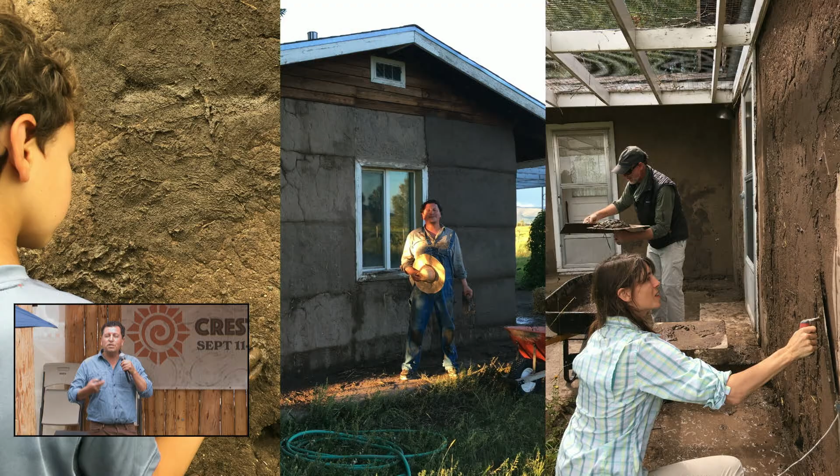My own great-grandmother's sister's family's house, which I use as a test site for teaching traditional and indigenous building technologies, how to earth and plaster in traditional ways, how to make adobes, how to make hornos. I tap into traditional cooking traditions as well that were practiced by my family. But there is an ethos around thinking about what is in the landscape and how can we build with that material.

So I host workshops often that connect people of earth and heritage practices back to these practices that have been disconnected from their traditions because of capitalism, because their lifestyles are changing, because of assimilation. And so earthen architecture practices aren't continued anymore because of changes in code regulations and building regulations. So I teach these classes on how we can reconnect ourselves through the maintenance and restoration of these buildings.

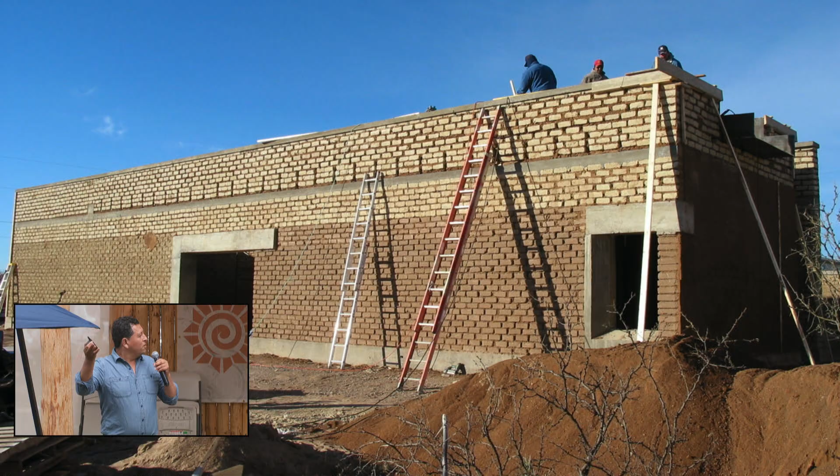Also, as an architect, I design buildings made of adobe, contemporary buildings. This is probably the first adobe building built in Marfa, Texas in 100 years, called the Box House, entirely made of adobe, plastered with adobe on the inside and on the outside. The bricks on the bottom come from New Mexico. The bricks on the top come from Ojinaga, Mexico. So there's a future archaeological project or anthropological project or geological project built into this house that connects this house to borderland landscapes.

I also think about how there's a politic embedded in building with earth. Not only the politics of working with codes, but also the politics of being activists that want to hold true to these traditions of building, and how adobe buildings can be a political project.

This was a project I collaborated on with two artists from Europe called Prada Marfa. It's not an actual Prada store. It's a sculpture. It's an installation built in the Chihuahuan Desert in the middle of nowhere, but it holds the 2005 line of Prada shoes and purses. So there's a paradox in this building.

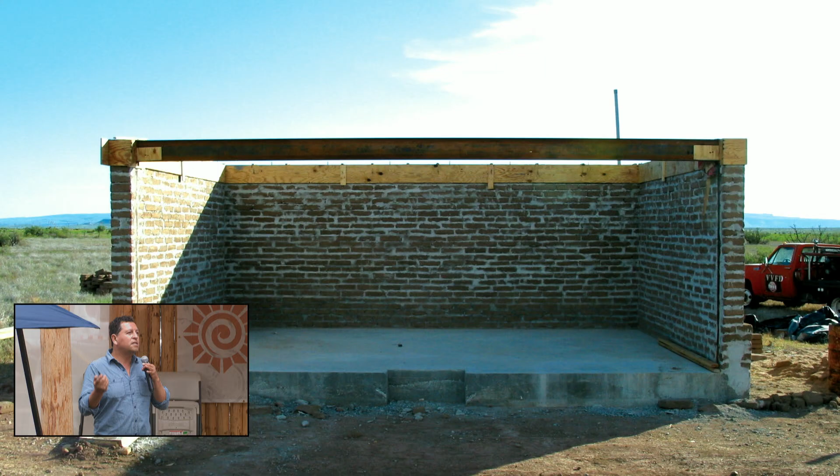There's a paradox about this building being in the borderlands, about a site where people walk hundreds of miles to come to the United States, a site where these shoes that cost in excess of $1,000 are on display, and it talks about the borders between wealth and poverty in the United States, particularly in the borderlands of Texas and Mexico, and the contemporary borderlands. A building we made out of adobe to demonstrate again that juxtaposition between wealth and poverty, between contemporaneity and history and tradition.

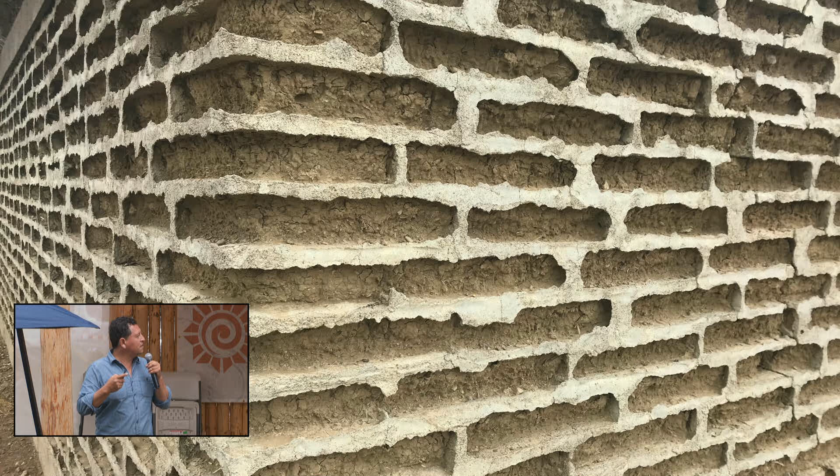We set each adobe brick in a cementitious mortar, not because that's a better way to build, but because that's what the US military used to build forts after the Mexican-American War along the Texas-Mexico border. And you can see those buildings in Marfa, Texas, and how time has taken a toll on, in fact, eroding the adobe faster because it's set in an impermeable layer of cement. In fact, this wall just collapsed recently, I was told, after being there for maybe decades or close to 100 years. But these are expressive ideas about how we can communicate politics, tradition, culture within a very single, humble material.

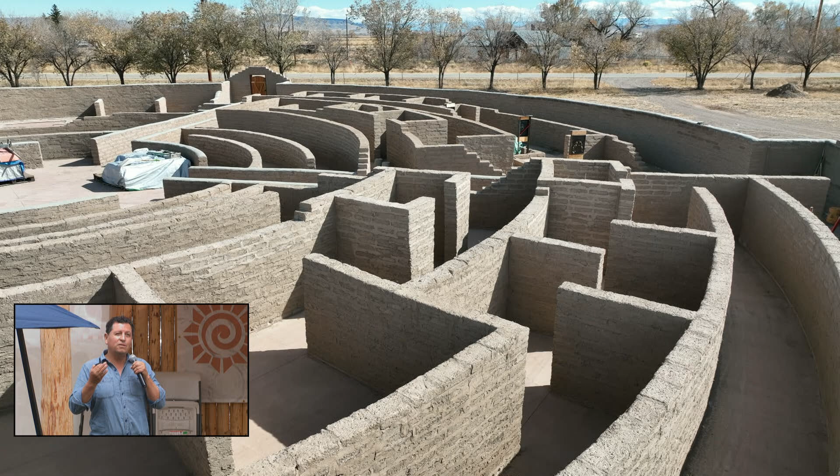If you've been to the town of Conejos in Conejos County, I've been working with the community there for 20 years to design and construct this labyrinth as a site of internal reflection, of prayer, of spiritual contemplation. And it finally was completed this year after 20 years. The community made over 40,000 adobes to build this structure. We taught the community how to make adobes, for those who didn't know, how to stack them, how to lay them. And after 20 years of slow process, this came together.

Obviously, I have an obsession with earth and architecture. I try to share this with the world. I have a website called eartharchitecture.org. You can go to that website, and it's kind of a repository of earth buildings from all over the world. Because earthen construction is actually what connects us across the planet. People build in New Mexico in the same way they build in Mali, Africa, in the same way they build in Yemen, in the Middle East. On every single continent, you can find similar construction processes and methodologies.

In 2008, I also wrote a book called Earth Architecture, which talked about earth being a modern building material, a building material that can connect us to, at that time, our 21st century lifestyles. And at the very end of the book, I wanted to talk about what the potential future of earthen construction was. I talked about how the internet was connecting us and shaping the way we can inform each other about earthen construction practices. But there was a novel technology that was emerging called 3D printing.

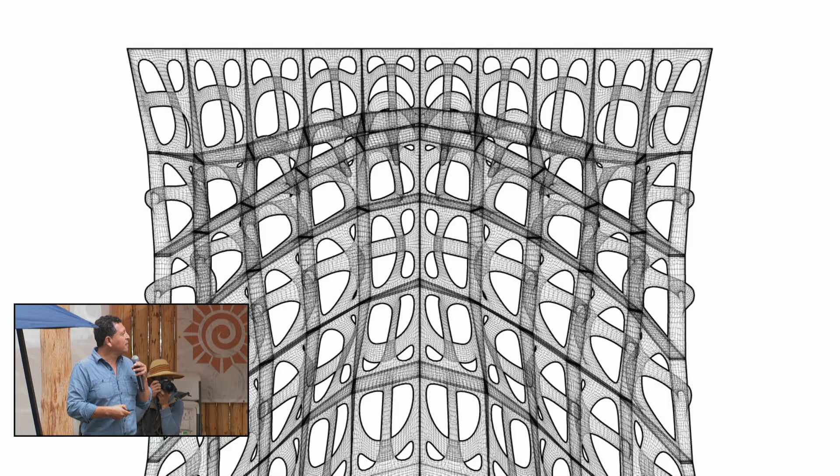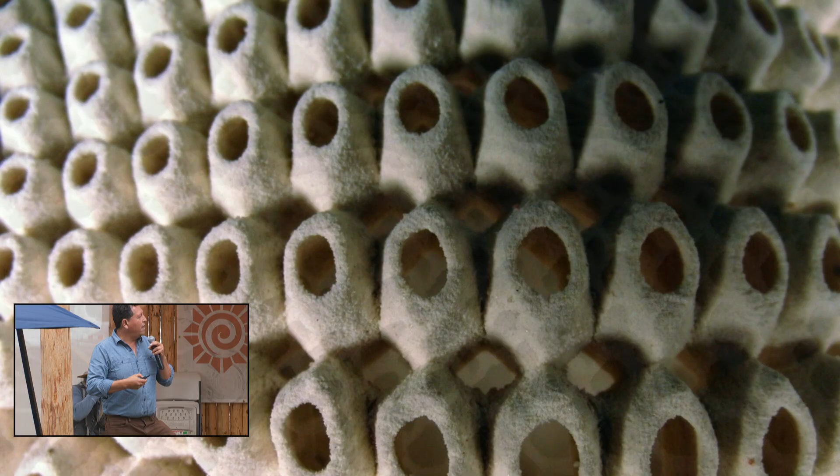And we had lots of successes in using clay and being able to use additive manufacturing to make objects like this. They were very fine and detailed, and because they were so fragile, we began to fire them and make ceramic objects. And I wondered, if a robot can make ceramics, what do we do? Do we make bricks? Do the bricks hold plants? Do we make bricks that have air pockets that can hold insulation?

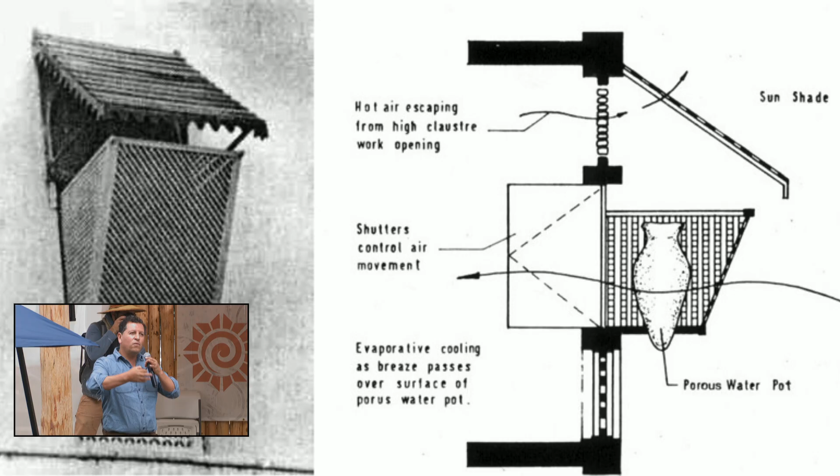Can we build upon traditional ancestral intelligence to think about how we can transform simple things like some of the earliest swamp coolers, which were made out of very porous ceramics, that were often placed in a window where cool breezes came over that humidified the air, lowered the temperature in a building? And could we make bricks that could do the same thing, that could hold water, that can pass air through, humidify the air?

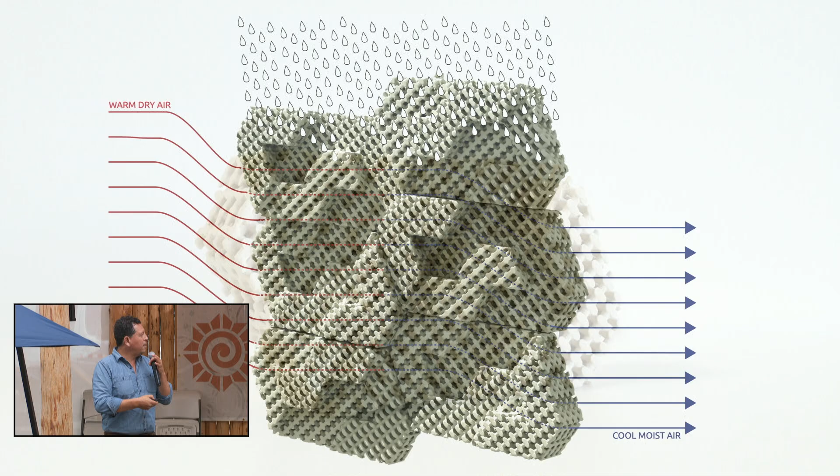And so these are some of the first 3D printed bricks that were highly porous, that had micropores that could hold enormous amounts of water, but also larger pores that air could pass through and ventilate a space inside, that had a tensile component to the way the mortar attached, and had shading elements that kept the water from evaporating more quickly. I called this the cool brick.

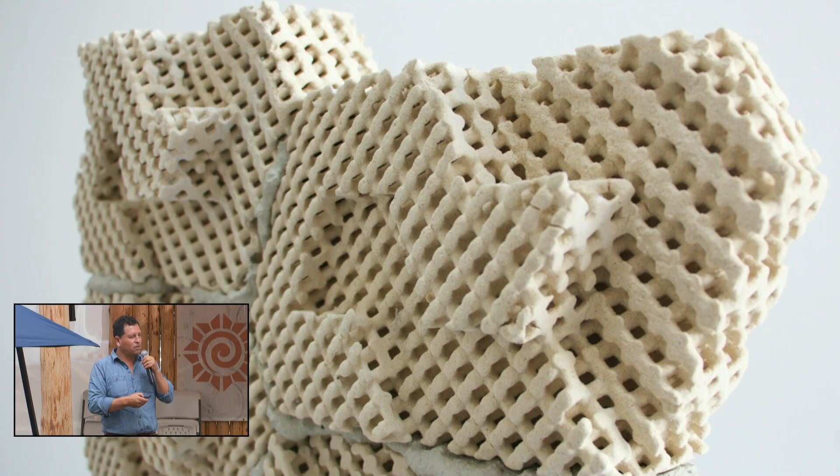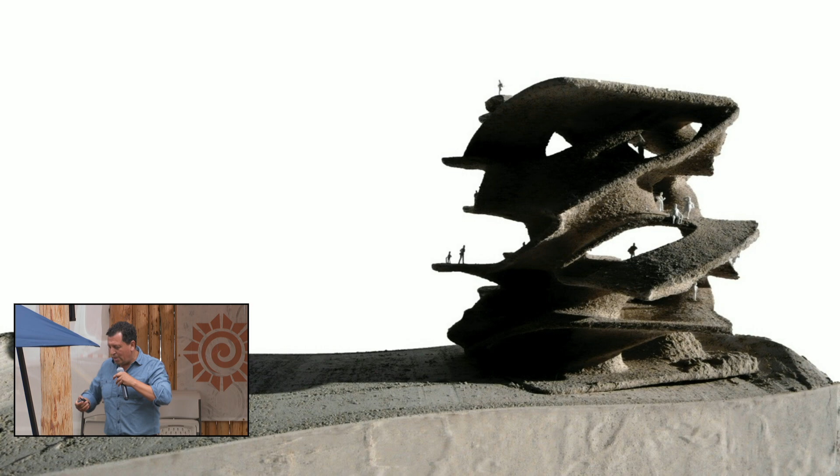So we started to use clay, started to experiment with sand, began to think about how we could make objects made out of sand. And this is at a time when 3D printing was in its infancy, and it was very expensive to print a very small object with a 3D printer. A small object as big as this microphone might have cost $80 to make at that time. But because we developed this material using sand, it became very inexpensive.

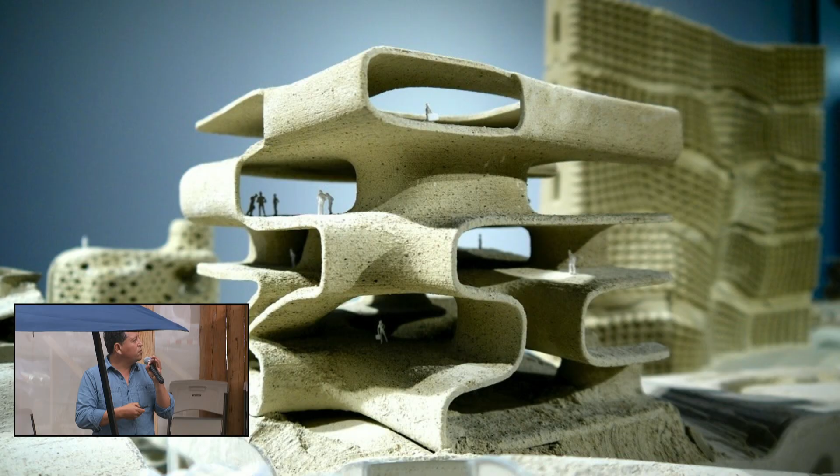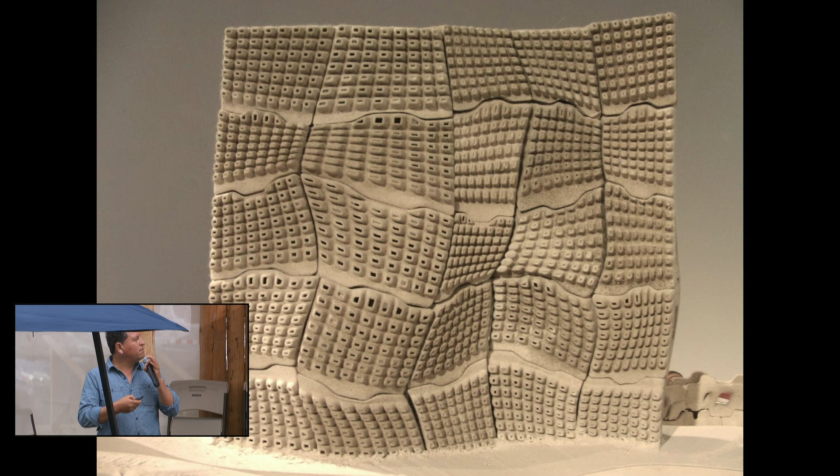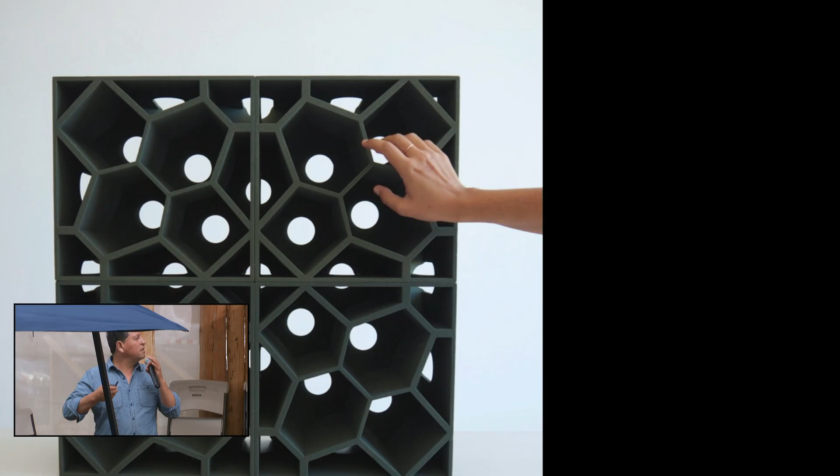And I began to imagine, well, what could buildings look like if they were made out of this material? But also, I was making models. Then I realized, oh, I can make assemblies of parts that could begin to make walls. And so these are some of the earliest studies made out of sand, thinking about how we can create an aggregation of objects based on the dimensions of the 3D printer that we had, and make much larger objects that attenuated sound, that responded to structures, and also always looked back to the ancestral intelligence that were embedded in our

knowledge base of construction. And so if you're familiar with Incan ashlar masonry, you find this in Cusco in Peru, these interlocking stone blocks that are very difficult to achieve. It demands incredible craftsmanship to make blocks like this. This one, I think, has 12 corners of interlocking these blocks very tightly. But we could maybe 3D print earthen blocks.

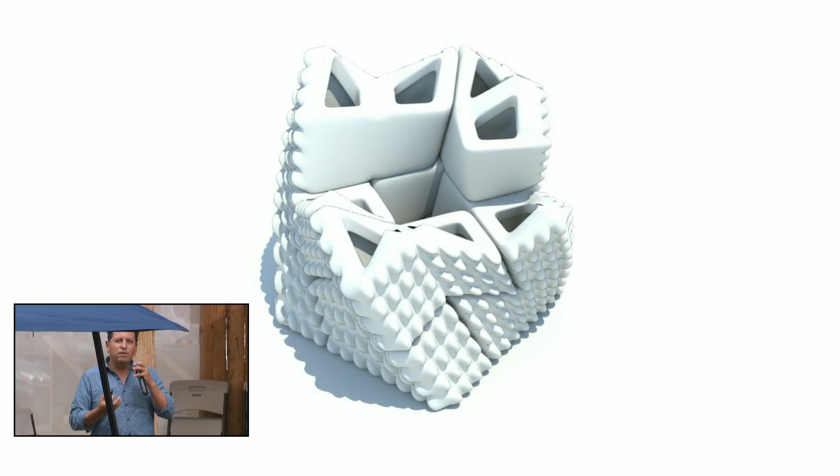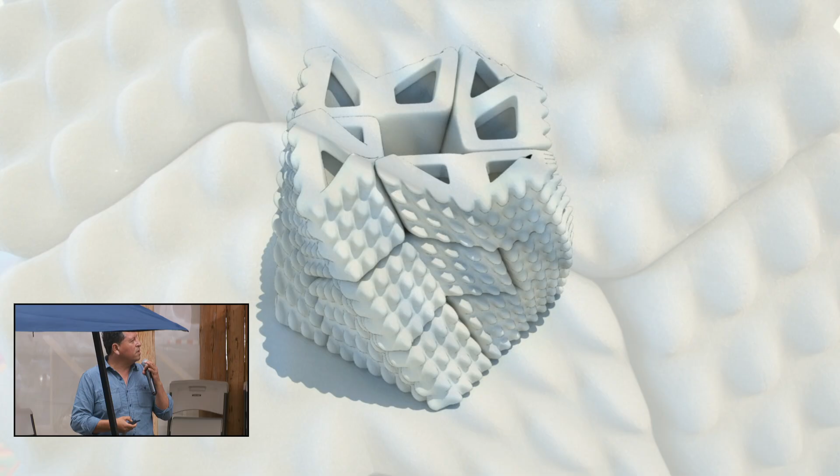Those blocks in Cusco actually respond to earthquakes. They're very seismically resistant to earthquake forces. Could you create blocks that do the same thing with a 3D printer, that allow them to be interlocked, that have instructions embedded in them, that have handles on them, so you could quickly build a structure that's seismically resistant using the building material right beneath our feet?

This journey of thinking about local materials and this ethos about adobe allowed my studio to expand the possibilities for what else might be considered a local material. And we began by just looking around the kitchen, the things we throw away, like coffee grounds. And we began to invent a material for 3D printing that used coffee.

If you're familiar with 3D printing, there's a lot of plastic 3D printing materials available that put a little bit of coffee or a little bit of wood or a little bit of some material so it kind of looks like this. These are 70% of that material. So that's 3D printed coffee. Those are 3D printed coffee cups made out of coffee grounds. You also saw a teaspoon made out of sugar, but it didn't make sense to make the teaspoon out of sugar, so we wondered if we could make teaspoons out of tea, but we made teacups.

We made a teapot that was based on the first pot ever. The first object that was ever translated from a physical object to a digital object was this teapot called the Newell teapot, or the Utah teapot, because it was developed at the University of Utah. If you ever watch any Pixar movie, they always put the Utah teapot in it because the technology that was

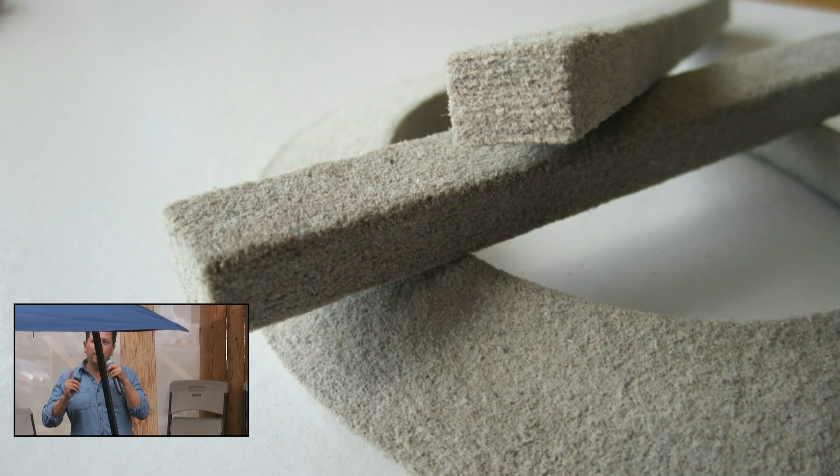But we experimented to see if we could make a material for 3D printing out of this waste product. And so these are Chardonnay grape skin objects and cups that we made out of that. Not only other biological-based materials, paper made from paper pulp and paper waste, newspaper waste in this case. These experiments made of paper pulp evolved to the point where we could begin to print with sawdust.

And in the US, we produce like 7 million tons of sawdust a year from the construction industry, and it usually goes into landfill. So this became a very productive way to think about how we could use this sawdust, not in a subtractive way.

And what I mean by subtractive is that we have a forest, we cut down trees, we take those trees, we subtract them, we make boards that are used for construction when we chop them up. And ultimately, we're left with a lot of sawdust. Could we use this additively to imagine the way we can make new products in the future?

And so we developed a 3D printing material made out of sawdust, always imagining how we could maybe make building facades, components in automobiles, screens, any kind of object just made out of 3D printed wood. And it became very, very successful. We actually started this company and sold this company. We called it Forust. We believe that the forests are for us, so we should save them.

And unfortunately, when you sell a technology, you think that all of a sudden that technology is going to take over. And I was very excited and said, now I can print anything. I'll print a house. That was our first project after we sold this company. And instead, this company decided to shut it down. Just like they bought it, and they don't want to do anything with it.

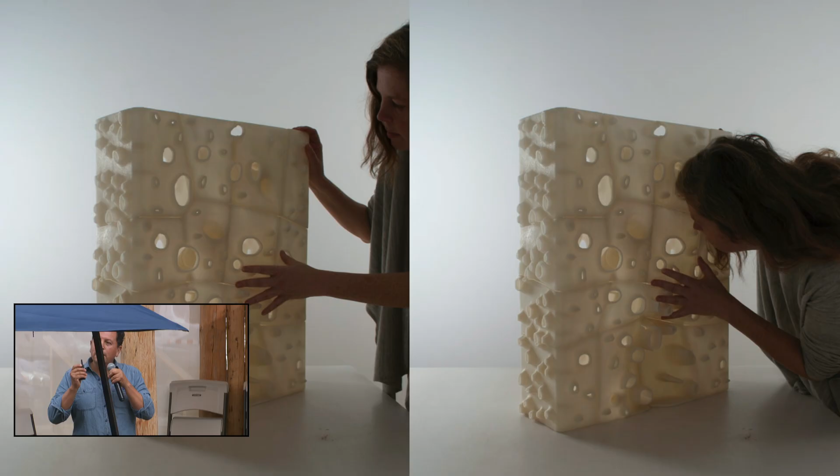Yeah, I guess you could eat the wood if you wanted to, but they're totally non-toxic. In some cases, we would coat them with a sealant made out of bamboo that was developed at the University of California. So it's like a low VOC polymer. Every single wood product in your home is coated with a polymer, but they produce a lot of gases. This one, in fact, came from a recycled bamboo product.

Because some people ask me, are these waterproof? And in many of these cases, they actually are, and these epoxies actually strengthen them. So this is an experiment of salt. So we're beginning to think about how we can scale up other materials, car tires, cryogenically frozen car tires that are pulverized, developed into a 3D printable material. And these are some of our experiments that came out of our studio.

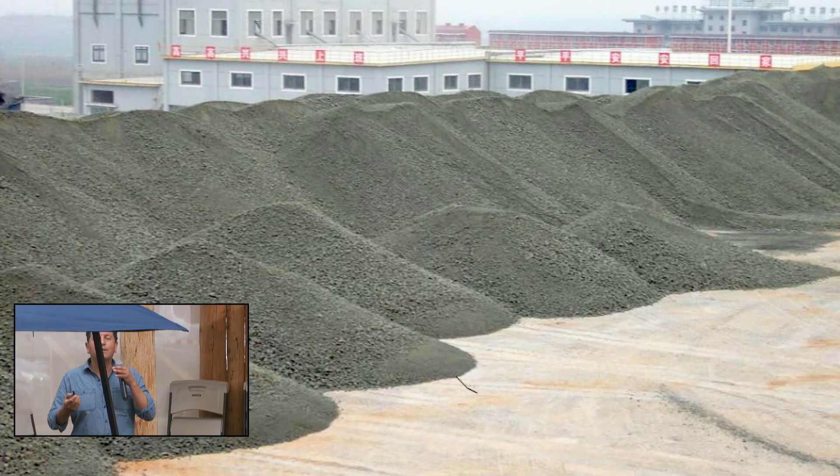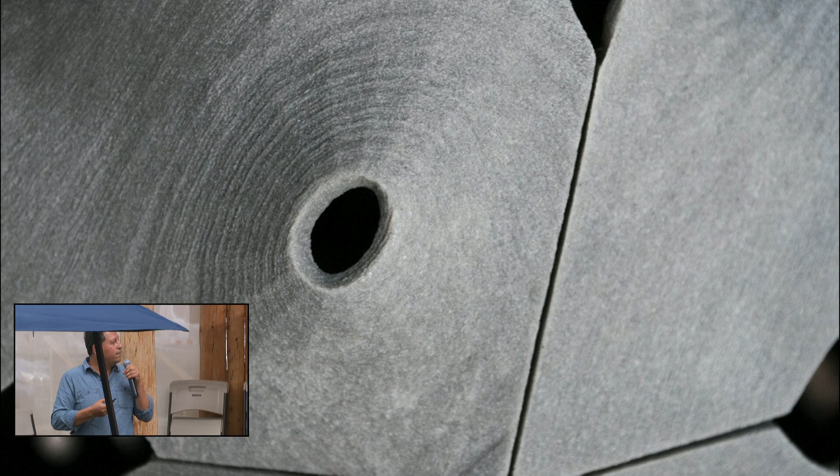And of course, cement. And that's where the 3D printing industry has gone. But we developed a way to produce objects with cement that used very, very little water and no formwork whatsoever. It can make very complex objects, very thin objects. The cement was even translucent if we could print it that thin, about 1/16 of an inch thin, and extremely lightweight.

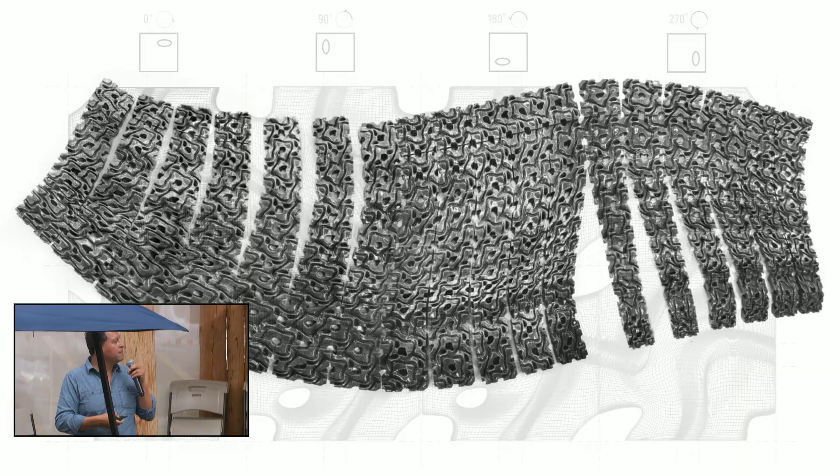And so lightweight that they became, you couldn't pick up a concrete ball this large, but these were very lightweight objects that could be assembled very quickly. And so these aggregations allowed us to assemble furniture, partitions, spaces, objects.

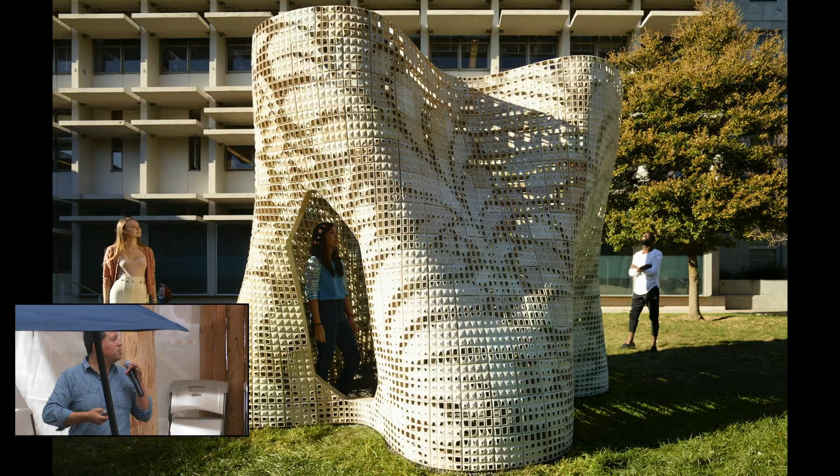And one of the beautiful things about this way of working is that if you are a designer or an architect, you typically create a set of instructions for someone to craft or build the thing that you want to build, whether it's a building or a piece of furniture. But the beauty of this is that you can design this in the computer and go straight to manufacturing, straight to construction. So the very same information used to create this model was the very same information used to create this space, this object. And extremely complex.

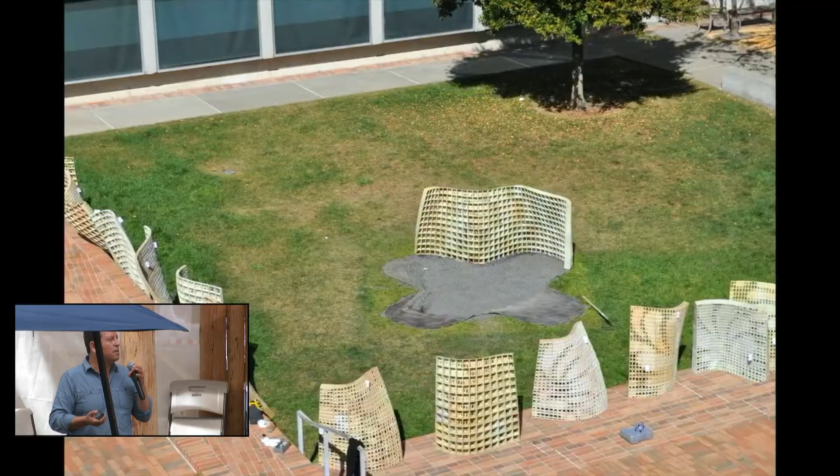Every single one of these is an experiment in a way of working and exploring the possibilities of additive manufacturing. In this particular instance, these experiments very much had to do with the notion that you could disassemble and assemble an object quite quickly, and just a few people could assemble this room in just a matter of 15 minutes or so.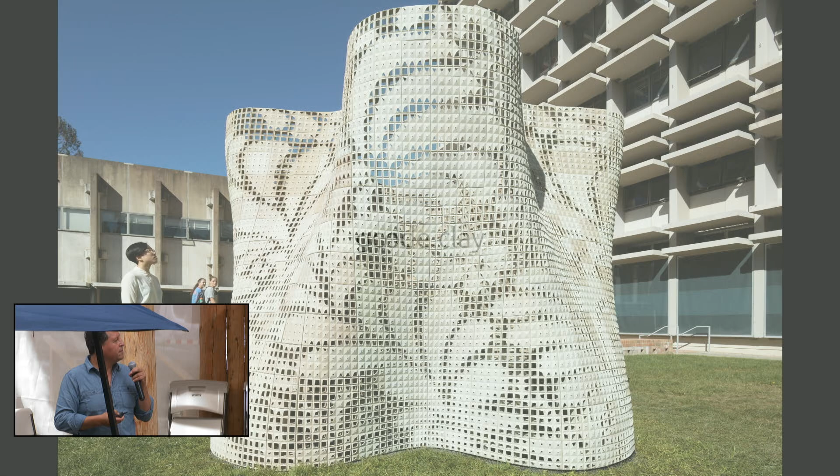So it was an incredible diversion that lasted many years, that we began with earth and ended up with salt, wood, rubber, car tires, all these things. But the idea was that we would always return to a way of thinking about how we could scale up the possibility of printing with earth. One of the requisites of this was to have a higher degree of control of the movement of a robot to deposit earth in a particular way.

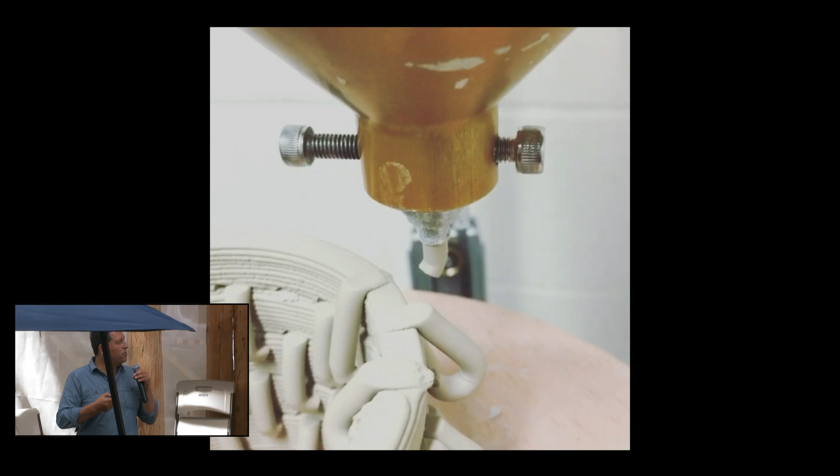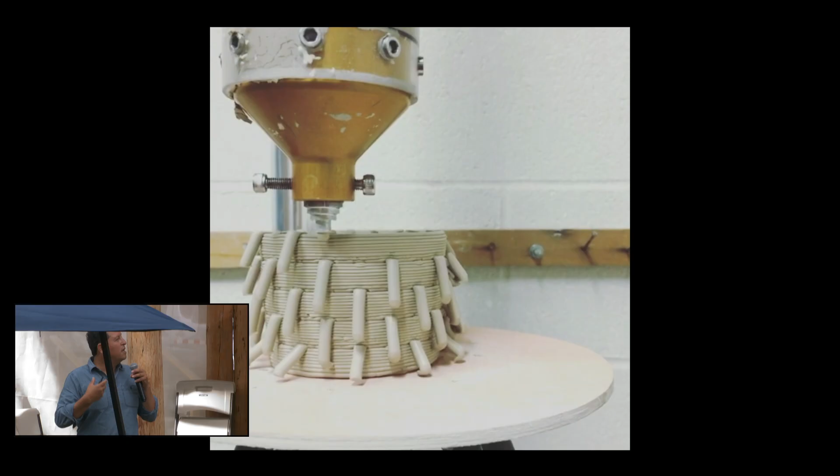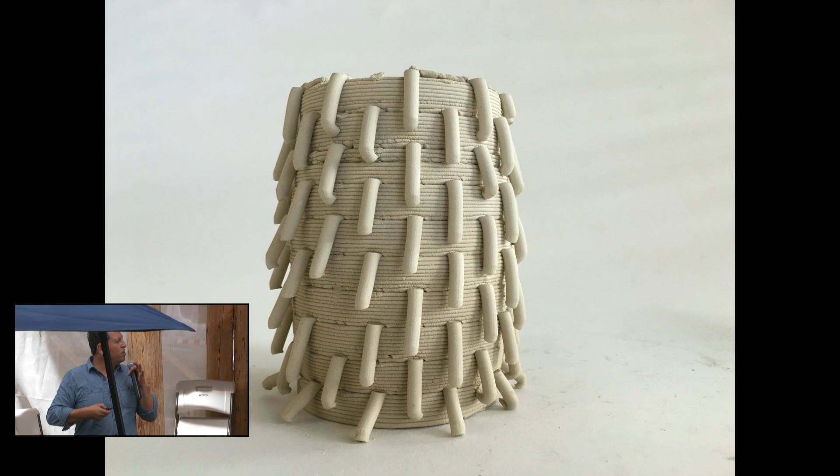And about 8 years ago, we started on a project that began to 3D print with ceramic clay, and we started to create these very weird objects. And this was a very different journey that we embarked upon, because we are not ceramic artists, but we had invented a way of placing clay down that didn't follow the rules of 3D printing. The rules of 3D printing is that you're making an object in the computer, and the idea of that with a robot was to make the exact object that was in the computer.

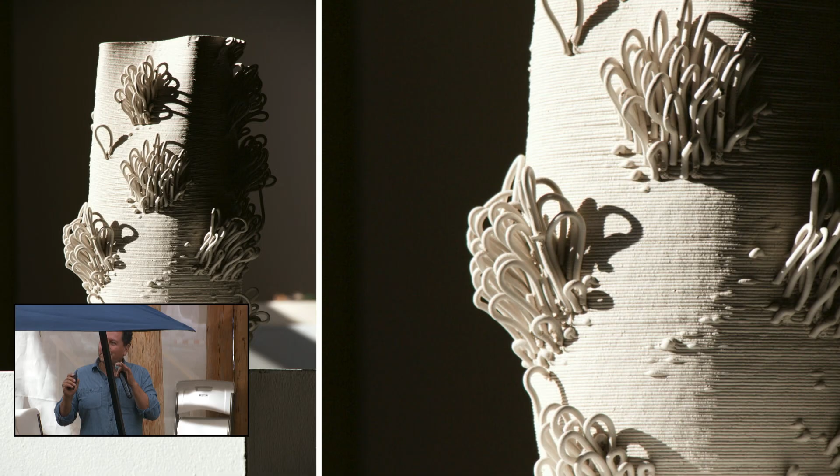But instead, we found that the glitches were the most exciting part, that you could deviate from the making of the object to make objects that had incredible textures, new kinds of possibilities that responded to the gravity and plasticity of the material. The same way that you would do with your hands when you're building a building made of adobe. You might experiment, you might push, you might leave your handprints in it. In a way, this is leaving a digital handprint based on errors that we calculate into the making of these objects. Not knowing what these are good for, just that they're really beautiful and interesting in a very scientific way or in a very artful way.

And we explored ways of making ceramic objects with incredible textures, different kinds of forms or shapes. And you might think these are all vases, but they're not vases. What these are all are studies in the movement of a robot depositing clay. They're mathematical formulas that become material. And we began to think about, okay, well, how can these become building materials, and what are they good for? Could they become facades? Could they become new kinds of cladding systems, micro shading devices, shingle devices?

The politics of printing with clay also entered into this. I don't remember when this was, like 6 years ago, we were invited to explore this idea at the University of Texas at El Paso's Rubin Center. And we asked if we could invite 25 ceramic artists from El Paso and Juarez to participate in using robotics to make ceramics. And we worked with the geology department at UTEP, and we went around looking for traditional clay sites, and we found this incredible spectrum of clays that we used that were found both in Juarez and in Texas. So they're this binational borderland ceramics, and the potters produced over 250 ceramic objects using local clays, found both in Juarez and El Paso.

We pushed this idea further, of this idea that an object, sort of like Prada Marfa, has a politic embedded in it because the soil has a politics embedded in it. Whether the soil is contaminated by something that happened, whether the soil lies in Mexico or the United States, or it's blended together to become a fusion. And so we created a series of objects based on something that our president said when I was in El Paso. He said there's a lot of bad hombres at the border. And I was there in El Paso at the time, and I said, well, that's really interesting, a bad hombre.

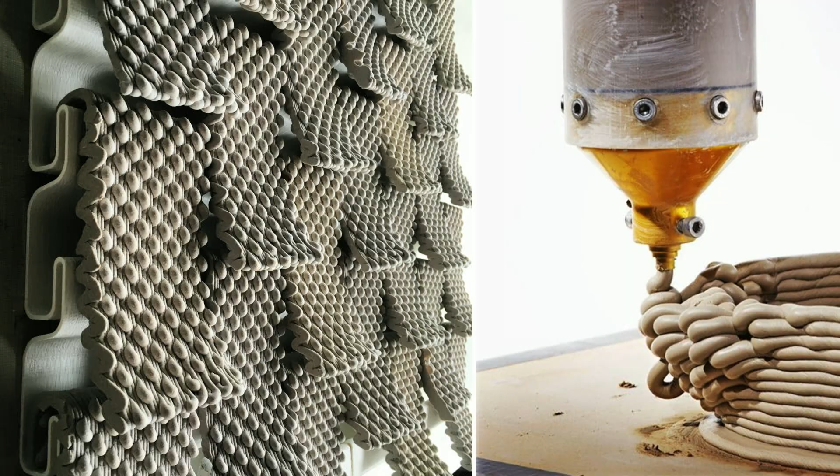Each of the shingles is actually digitally exactly the same. They're clones of each other, but we developed a system so that when they were manufactured, they'd wiggle a little bit so each one became unique. And we used recycled clay for the entire structure.

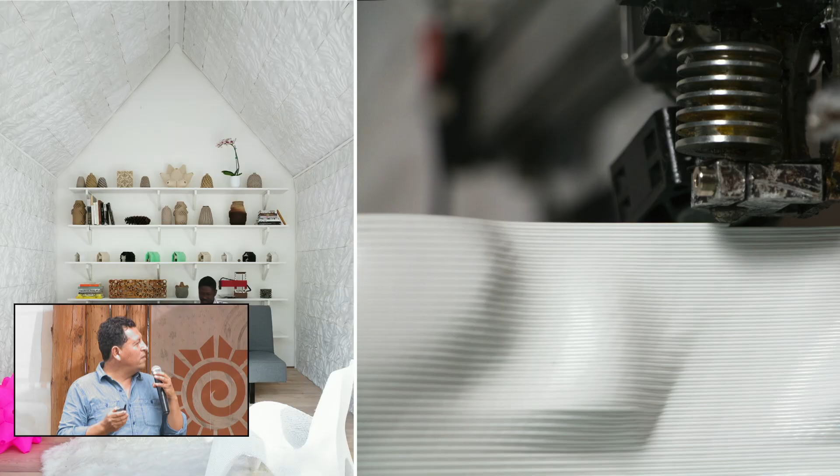You can see 3D printed coffee, a pot made out of coffee, the wine globules, the furniture, this cladding system that is very much like a pressed tin ceiling, but where every surface is actually unique instead of similar, because it's not mass manufactured. This is at night. This is the transformation of that small little cabin into a place to sleep. And that's the Cabin of 3D Printed Curiosities.

And now, I'm always wondering, when do we make the switch to move to the 3D printing of the Earth in a more robust way? And that has been the goal forever. And it's only been in the last 4 years where we began to make the reality of taking the soil underneath our feet and printing it at a much larger scale.

At that time, 7 years ago, this was kind of the dream, that all those objects were actually aspirational scaled objects, models, to think, can we do this using the soil underneath our feet, using these 10,000-year-old traditions of adobe. The first thing we had to do was invent a machine.

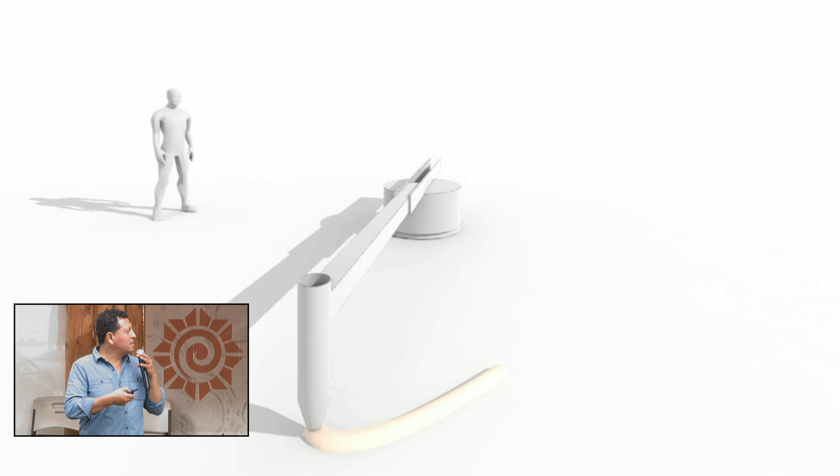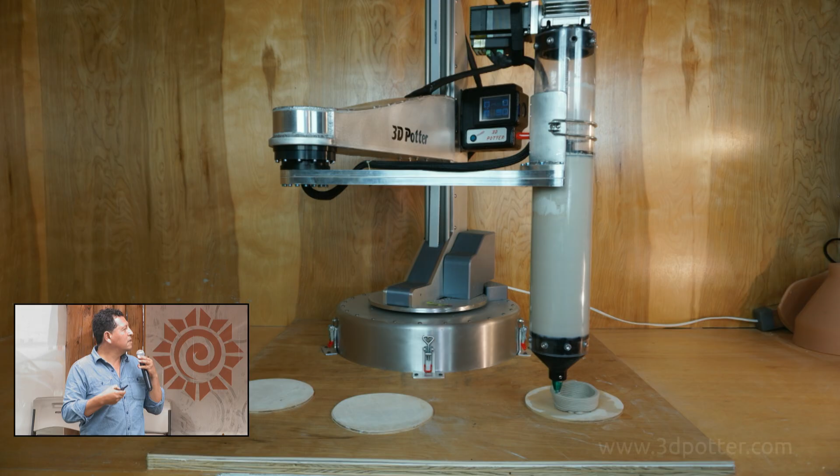I sent this schematic design to a company to see if they could make a robot that moved this way. That would be very inexpensive, and we collaborated over the course of a year, and we produced this robot, which is now sold everywhere. They've commercialized it. The beauty of it is it could make many ceramic objects at once, or it could make one big object.

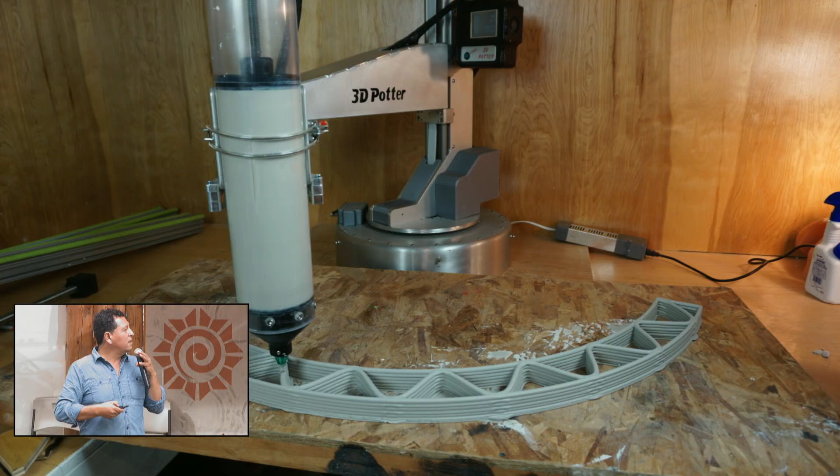It has robotic parts that you find in some of the most expensive robots, but this machine only cost about $14,000 to make, which may or may not seem expensive, but a typical robot costs about $80,000, and you can't do anything with it yet. You have to then program it. You have to get all the parts. This became ready to go.

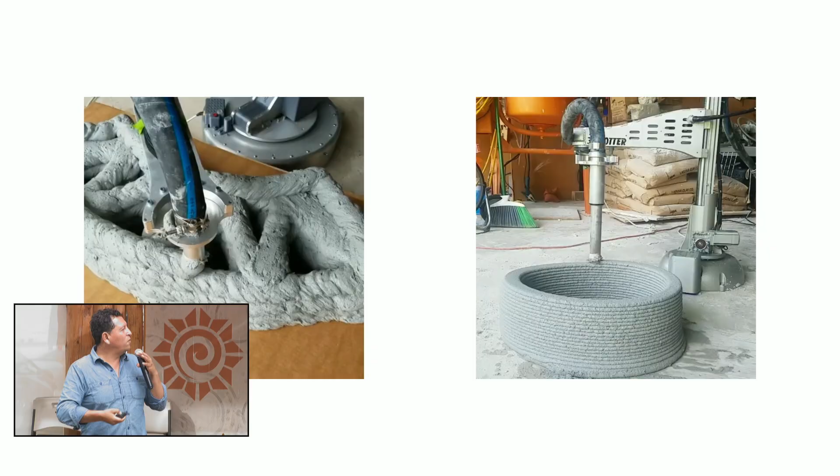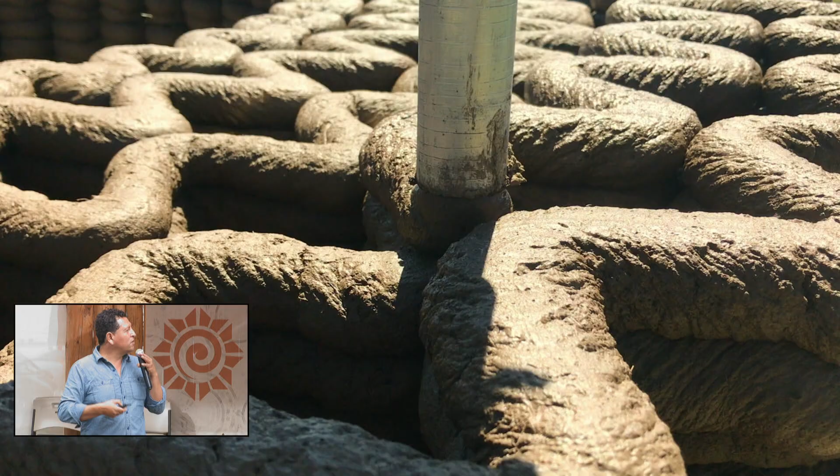We also had to figure out how to push large amounts of soil through a hose, and that took many, many months to do. This is a manual 3D printer making these objects, but we're exploring ways to move soil through a hose controlled by this robot. And eventually, we developed a formulation, precision, and once we did that, we brought it back to the historic borderlands in Conejos County to, for the first time, build with mud in a radically new way, using robots.

And it became an ongoing experiment that we called Mud Frontiers, because we're doing it in the historic frontiers of the United States and Mexico. And we're also exploring a new frontier of building technology that I hope can reintroduce us to our ancestral ways of building, since we've been disconnected from those ways of building, right?

We don't get up every morning now and go out and build our crops, mend our house, add an addition to our house, all connected to land-based practices. We get up sometimes, I don't know if you do, but we get up and we go to work somewhere. I imagine you all do, but this is probably a place where you have a greater connection to the land than most of the places that I lecture at.

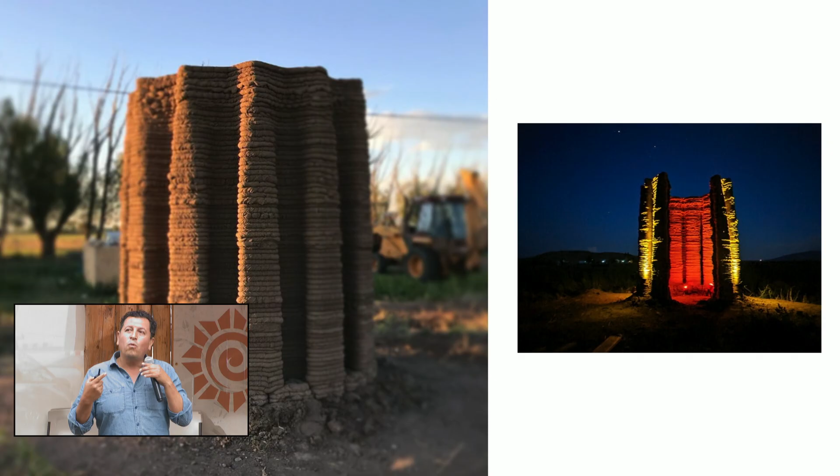But there's a heritage disconnection that has happened, an amputation that disconnects us from our ancestral practices of building with earth. And so my hopes are that this technology, while we might be still disconnected from the building of our buildings ourselves, we might be assisted by technologies that we can interact with. In the same way we democratize the software in an interface so that anyone can 3D print with clay, my aspiration is we can democratize the software so that anyone can design their building and participate in the building using robotic technologies, reconnecting us to a practice of earth and construction.

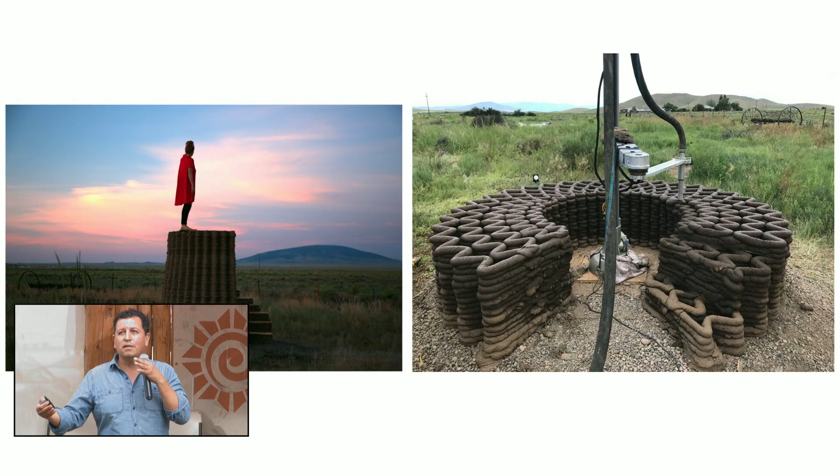Because for me, a building made of earth is not just a building material where we go to Home Depot and we buy a board. We don't know where this board comes from. We buy screws. We don't know where the screw gun comes from. For me, building a building made of earth means that we are digging from ancestral lands. We are connected to it with our hands or our ancestors' hands. And we have a cultural and traditional heritage relationship to that material. It is like a relative to us.

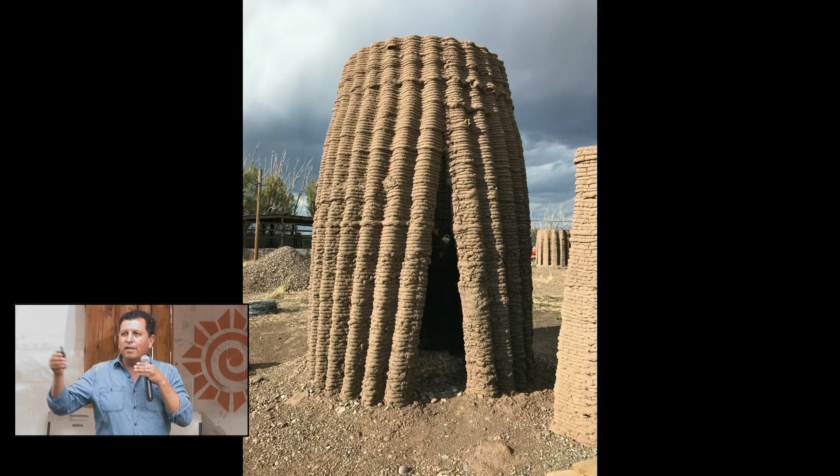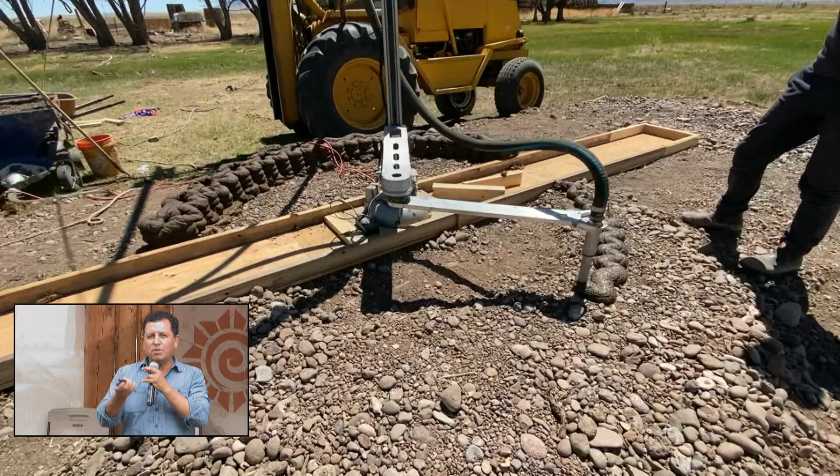And so I'm advocating for something different than contemporary construction practices. If you think about a typical building, walk up to any of these buildings, cut a section through it, you'll find that there is an exterior siding. There's probably a vapor barrier. There's probably a plywood sheathing. That plywood sheathing has glues in it. There's something that screws all that together. There's maybe a paint on that surface. There's an insulation. There's studs. There's wiring. There's conduit. There's plastic that wraps those wires. Keep going. There's sheetrock. There's the paper on the sheetrock.

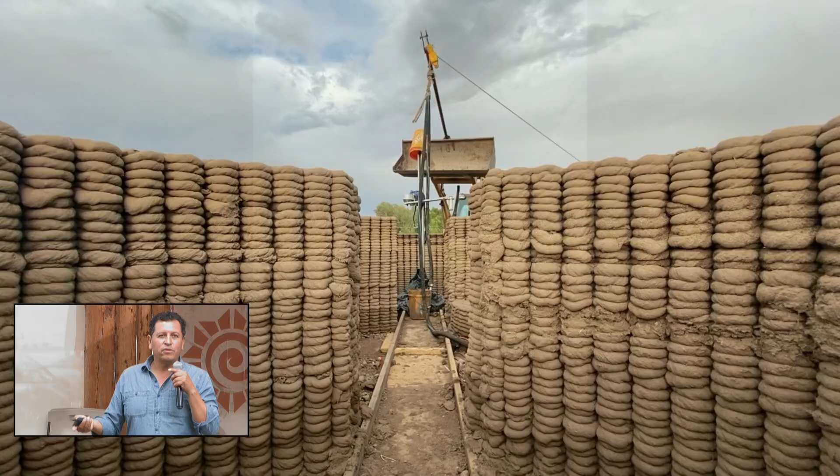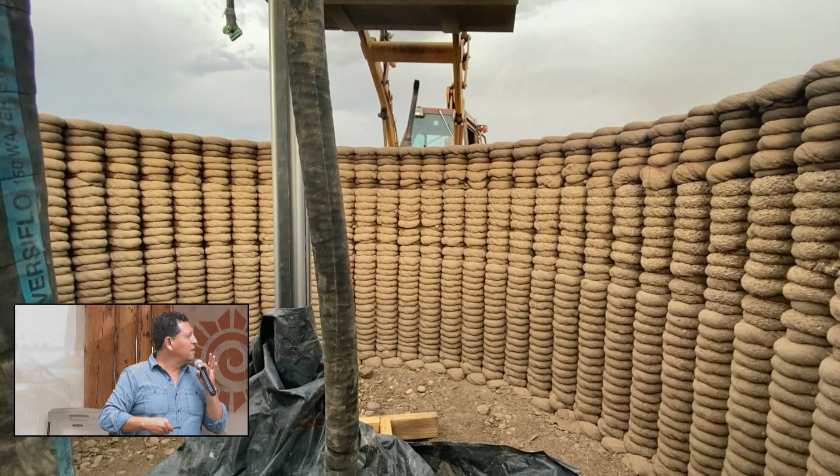There is paint. There's all the associated tools that are very particular to each one of those materials. And there's all the expertise that is connected to the use of each of those materials. So you hire a painter, you hire a sheetrock guy, you hire a woodworker. There might be 30 different companies in materials alone that are represented within 8 inches of wall. Not to mention the tools that are used.

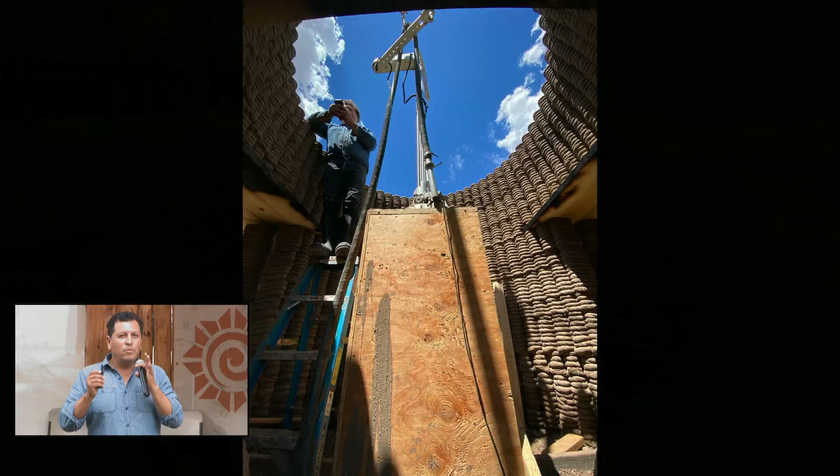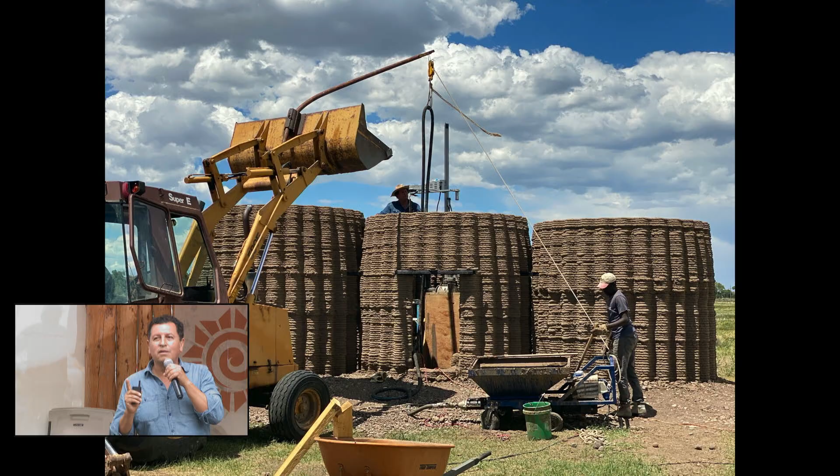And so the wall in contemporary construction is actually a real estate grab for thinness. All the companies want to find some way to insert their product in the thinness of a wall so they can profit from that. So when you build a building, you're building with multiple materials, with multiple expertise that come from who knows where. But what if we can move towards building again with one material that does the job of all those materials? So that's my aspiration. And these are experiments that I've been working on over the last 4 or 5 years, thinking about how we can take the soil from the site, using a robot, and create structures.

One of the first opportunities I had to do this outside of the lab, outside of the studio, was during COVID. I moved back here, I brought the robots, and I wanted to embark on a project that I called Casa Covida. Covida isn't really a word. It sounds like COVID. I built it during the time of COVID. Casa means house. Covida also sounds like cohabitation. This is a house for cohabitation during the time of COVID. It's an experiment in a multi-chambered room made entirely out of mud. 3 chambers have spaces for sleeping, spaces for cooking and warmth, the hearth, and a space for bathing and for reflecting on this relationship between earth and sky.

All my architect friends tell me, well, this doesn't have a roof on it. I said, the sky is the roof. And they said, well, what kind of roof would go on a 3D printed structure? And I thought about this for a long time, and I thought an inflatable roof would be the most appropriate roof. So this big translucent pink roof structure that could be inflated when it rains imparts this beautiful pink light into the interior, and was like a cherry on top of this chocolate sundae.

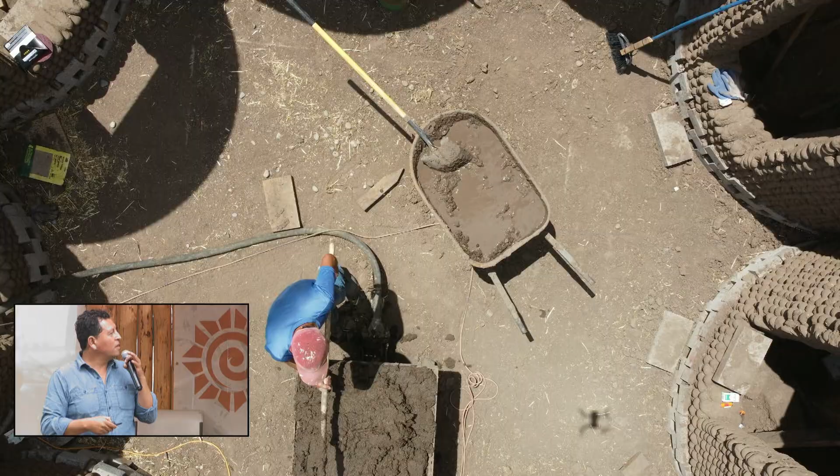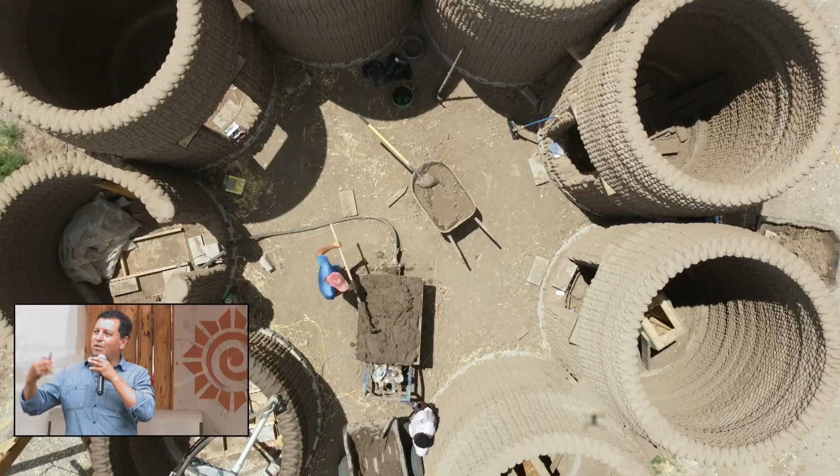And so there are 8 chambers, each of which are divided into 2 spaces. Originally, each of those spaces were intended to have a hot pool in them, so you would come to the Frontier Drive-In and you could soak. They didn't do that, but I wish they would have. Other things became more important.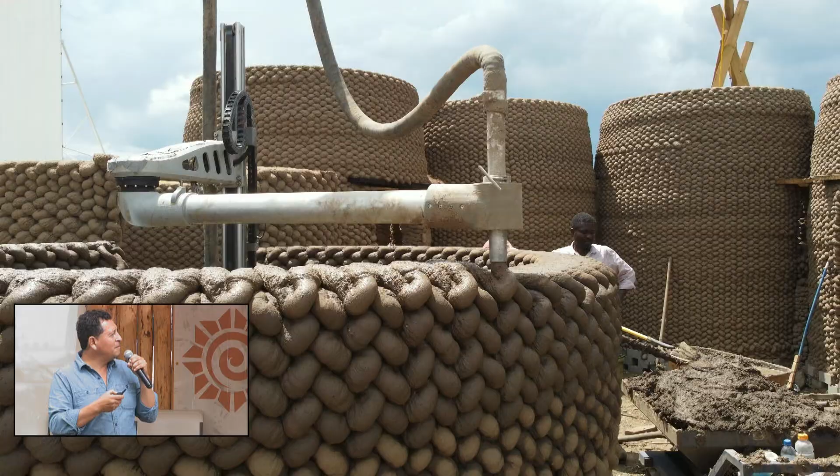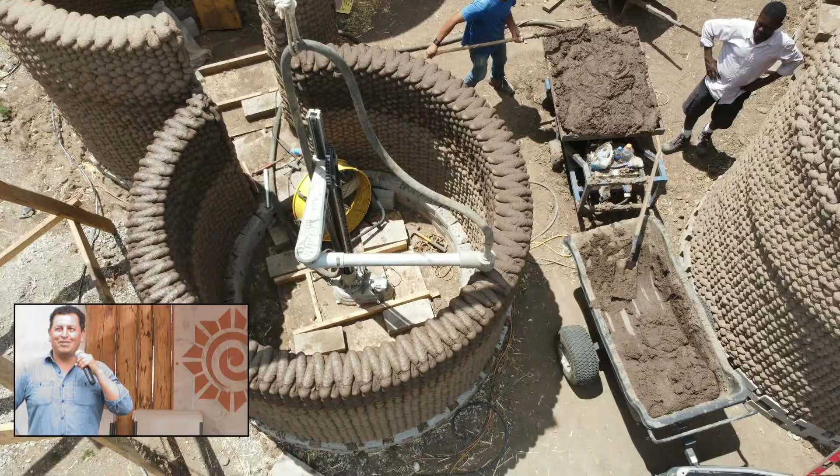But this is the project under construction, and you can see that 3D printing a building is a little bit like a security job. There's nothing really happening unless something goes wrong. And so you see what looks like people just standing around. My very expensive graduate student there in the white shirt just looking, getting paid $30 an hour. But really beautiful and helpful. That particular individual is now a professor at the University of Texas, and has gone in his own directions with the knowledge that he learned from working on this project with me.

I'll just let you enjoy some of these views of Skylos from above. Okay, thank you.

And I think what's most important about this project is it's the first permitted 3D printed building in the world. We went through the building department, it was engineered, it went through all the regulations in order to be approved. So a big part of this goal and the work is not only our ability to do it, but our ability to do it through the legal processes of construction in the United States.

I've been very fortunate that the success of this work has enabled me to scale up and to have a much more sophisticated robot that I was able to have manufactured over the last 3 years, which is still very portable, like the first one, which is not inexpensive by any means, but far less expensive than many of the 3D printing systems that you've seen that are bigger than the building that they build.

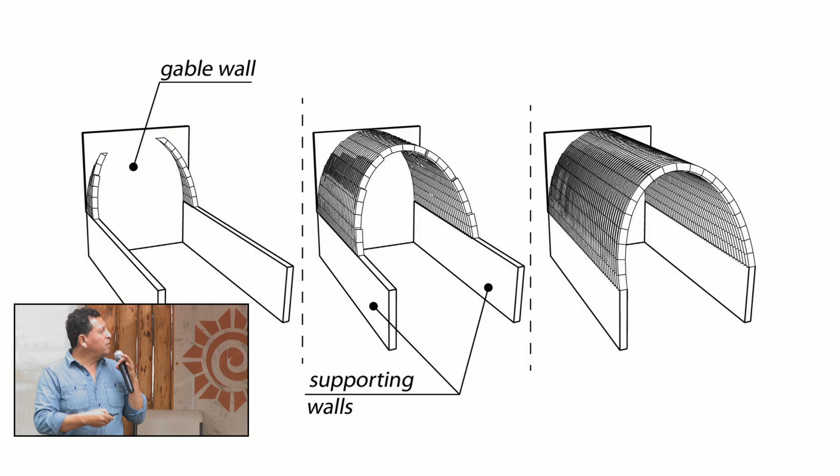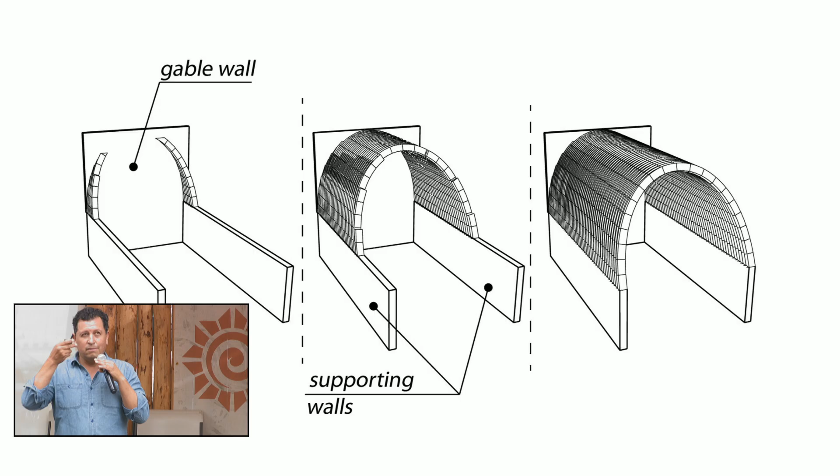But this recent experiment was an experiment to see if we can also build a roof out of mud. There's a technology that's thousands of years old that comes from southern Egypt and northern Sudan, where builders can build a roof entirely made out of adobe using no formwork, called a Nubian vault. Basically there's a wall that's built, and then the masons will stack adobes against it in the shape of a parabola, which is the shape your hand makes if you do that, which is the most efficient structural shape that brings gravity to the ground. They've been doing this for thousands of years.

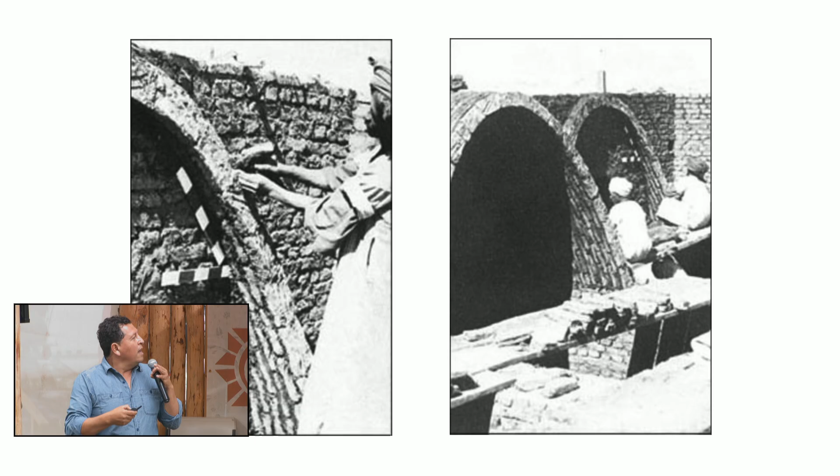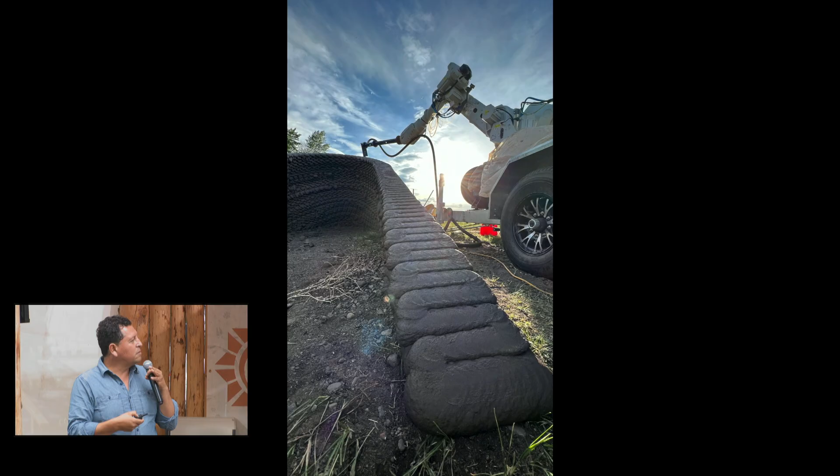And ultimately, you build it forward, and you make an enclosed structure. I wondered if a robot could do that. I wondered if we could take the same kind of algorithm that a Sudanese mason would use and translate that using wet adobe. And so this is the experiment to see if we can make the world's first on-site 3D printed roof. Not only the first 3D printed roof, but made out of mud.

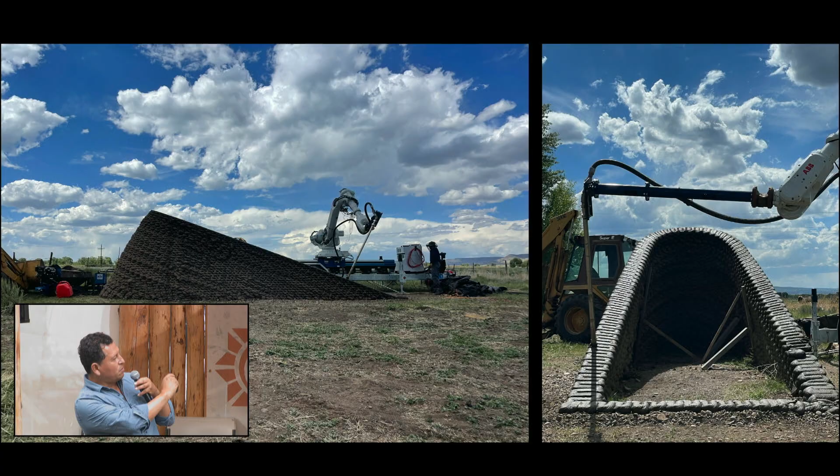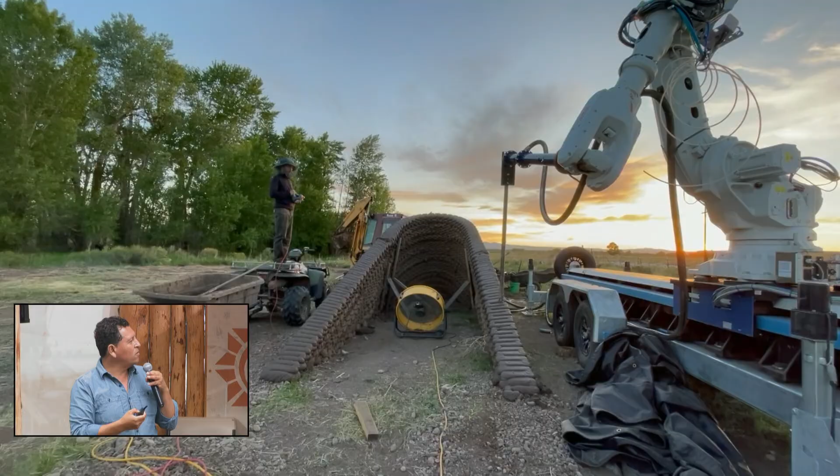And so you can see how it's printing at this angle using this robot that has 6 axes instead of the 3-axis robot that I had before. And slowly building forward. This pattern allows for a certain amount of friction so that the material can hold in place. And it prints until it encloses.

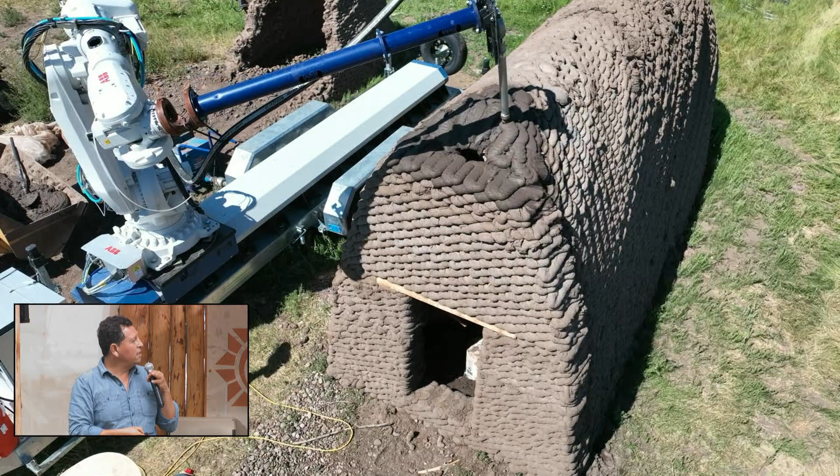And because mud isn't expensive, I don't mind that it spills a little bit, but you can see how it encloses off. And I'm flying the drone, I'm driving the robot, and my 14-year-old son is over there just making sure the hopper's full of mud. These textures prevent erosion from rain. It slows down rain. And there it is, entirely enclosed, the first 3D printed roof in the world.

A little small, humble structure, but I think an enormous leap for thinking about how we might build buildings entirely out of earth in the 21st century. So as I begin to think about how to scale up, I'm imagining what's next for this. How do we begin to print houses, architecture, buildings for people? And that I have not yet accomplished, but I'm beginning to do experiments that are operating at the scale that are very, very large.

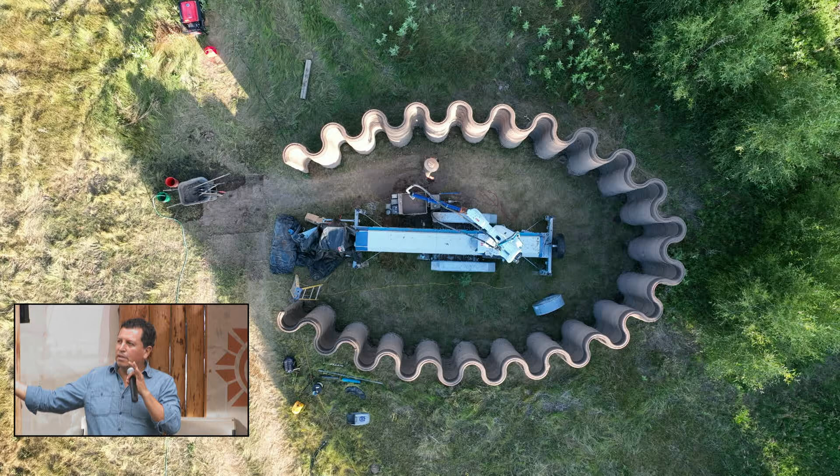And using this robot, I simply wanted to see how big could I build a building just by one placement of the robot. And so Serpentine is that experiment. So that's just one experiment saying this is as big as this robot can make. But what's interesting about all of these experiments, and this one as well, is that we think of adobe as a massive building material. The walls of my own house are almost 2 feet thick.

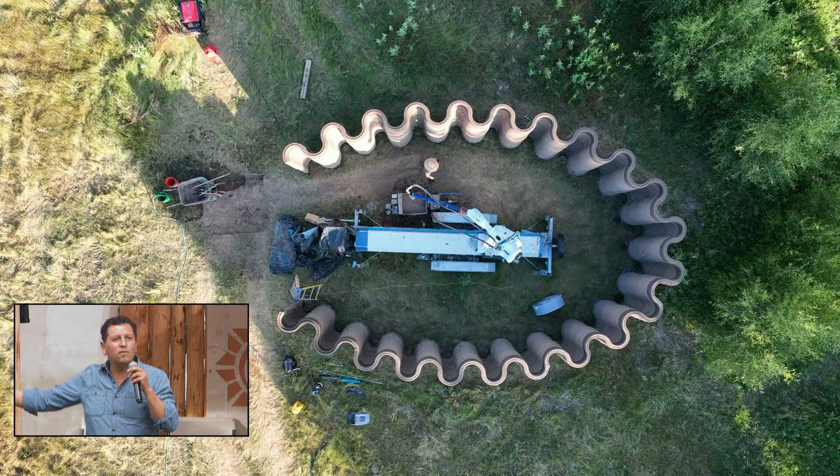But because I can deposit the material in this serpentine way, using these same curves that we explored in those very first ceramic pieces 8 years ago, I can make 10-foot high walls that are only 3 inches thick using the material. And that's an enormous benefit to thinking about how we might construct in the future.

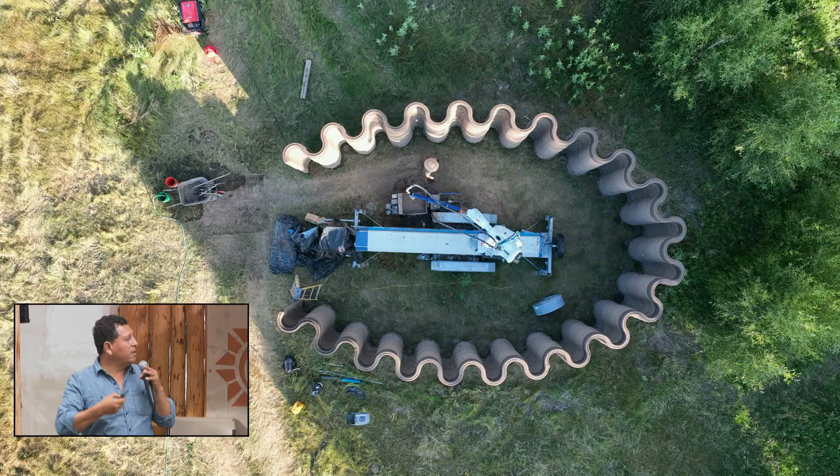And it takes on the idea of thinking about how we can work with the city, how we can work poetically, how we can work with a local source of material. And the material is really interesting because it comes from a mine within the county that provides all the soil for all the stadiums in the greater Los Angeles area. So it's an enormous material resource that came at a time when the very first layer of printing the structure was the day of the fires that burnt down LA.

And so it began a conversation about how we might rebuild LA using these material systems and these material processes. And so I've been in a lot of beautiful conversations about thinking about how to rebuild there. There are thousands of adobe buildings in the greater Los Angeles area already. The oldest buildings in California, just as in Colorado, just as in New Mexico, are all made of earth, the most celebrated buildings. And there's no reason why we can't reintroduce these building technologies and materials using a new way of building into our building culture.